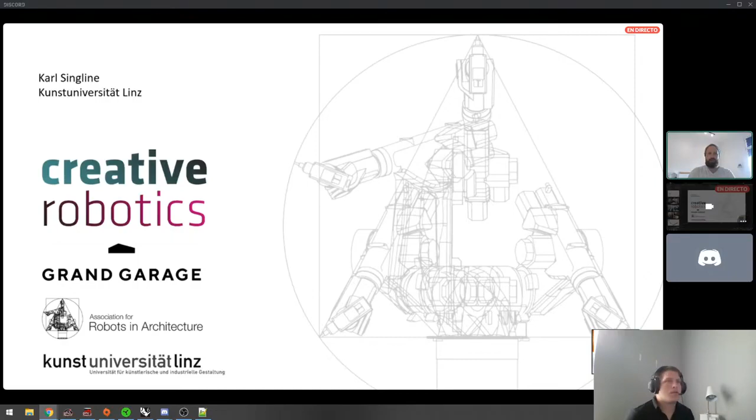Hello, thank you for the lovely introduction, Luigi. From what I understood from the Spanish—my Spanish is very little—I'm Karl Singline from Tasmania, but I'm currently living in Linz, Austria, working with Creative Robotics, which operates out of the Grand Garage. My background is architecture. I have a Master's of Architecture, which I gained from the University of Tasmania in 2016.

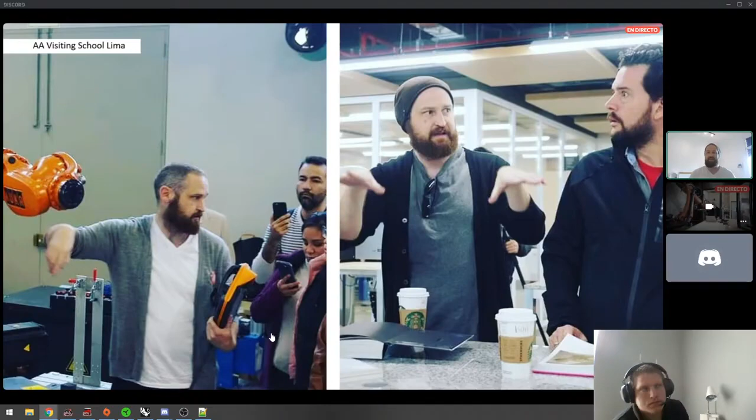So during my Masters of Architecture, which I undertook at the University of Tasmania, I was introduced to both parametric and computational design, as well as the wonderful world of robotics in architecture in particular. It was not uncommon to find me during my Masters working at the robot, trying to figure out how to get it to do anything. Now, through the skills I developed, I travel the world introducing people to creative robotics, robotics in architecture, and how we can use these industrial machines to produce unique and exciting things other than just automobiles and electronics.

A big part of what I do in my job is knowledge transfer, introducing concepts to a lot of architecture students, as well as industrial design and other fields that wouldn't necessarily discover robotics or parametric design at all. So traditionally within architecture and other industries, CAD/CAM looks a lot like this.

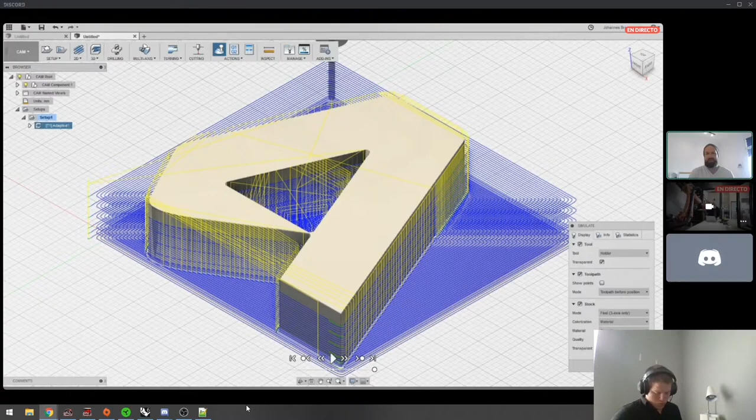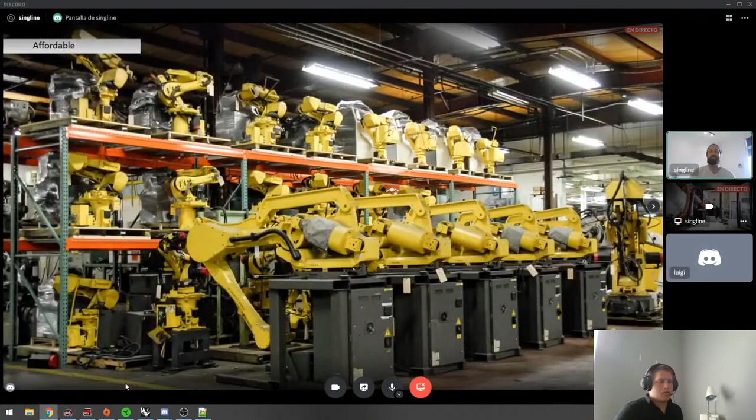Which means that once they've had their life in a factory, all of a sudden there's an abundance of these machines that maybe have done one repetitive task and worn out after a couple of years, but are still good—leading to a fantastic market of amazingly complex machines that end up on places like eBay for relatively cheap. You look at a high quality 3D printer that does only one material and only prints something so big, but you can find a 6-axis industrial robot on eBay that is still perfectly good and can work with the technology we've been developing for well under 10,000 euros, while industrial 3D printers go well above that.

So then the next step was shifting the industrial robots from manufacturing and fabrication in large scale factories to the lab space, where we can start to think about doing prototypes for architecture as well as other creative industries at one-to-one scale.

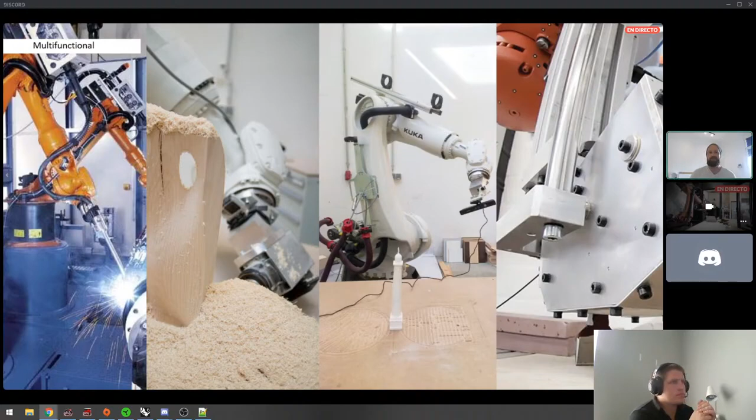The flexibility that these industrial robots introduce is how they can inform design, shift design, and make us think about our design with a higher level of freedom instead of relying on mass-produced fabrication techniques and materials. A lot of these characteristics are embedded in the robot—we've got multifunctional machines that can weld, can do 5-axis milling that a traditional 3-axis CNC can't do.

The flexibility of the different mounts in the last two images - you can have a camera that you can calculate the path for to scan 3D objects in a very precise manner, as well as the end effector, which was developed for one of Creative Robotics' exciting projects that we'll get to. And most of all, it's scalable.

I think we have an interesting question. Rene Jauregui asked if it's better to have a robot than a traditional CNC or 3D printing machine - is it better to have a robot instead of an industrial 3D printer and a CNC?

It's a fantastic question. The short answer from me is a robot, every day of the week - it's where my passion is. But I also believe in the right tool for the right job. If you're not doing something that needs 6-axis, then why do you need a robot? A robot is a lot more flexible than a traditional CNC or a 3D printer. A 3D printer does one thing, it 3D prints. A robot does whatever you can imagine to put on the end of it. It's a big dumb arm, it's got no fingers, no sense, but you can attach anything to the end of it and program it to do 3D printing, CNC, object manipulation, pick and place, testing materials. If you can imagine it, chances are you can do it with a robot. Whereas an inkjet printer or 3D printer is made for one specific task, and that's the only task it's ever going to be good at. So I hope that answers the question.

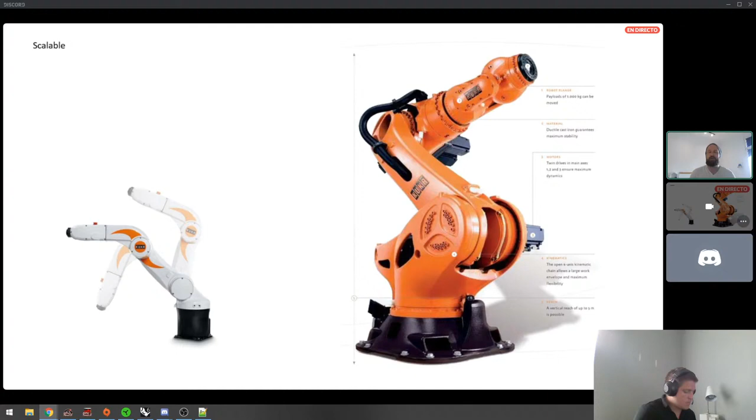So you can prototype digitally with a simulation, and if Kuka PRC or whatever software you're using outputs no errors, you can take that code, make sure it's set for the right robot, and it will repeat the tasks seamlessly. That's taking the digital into the physical, into the real world. Other processes don't allow so much flexibility when going from small scale to large scale, which introduces, especially in architecture and design industries, rapid prototyping - you see a bit of this in 3D printing, but 3D printing is limited, whereas robotics really increases what we can do.

My background is in architecture, so this introduces being able to do doubly curved forms, pairing parametric design, Grasshopper and the like, with robot manufacturing. Then we can actually realize these complex geometry shapes and introduce them into buildings where previously they were either too complex mathematically, or too complex or expensive on the fabrication side. Now these designs, which not too long ago were completely out of the realm of budgets, become more standard and exciting because you're not limited by the materials or manufacturing processes - such as the 3D printing done by Branch in the United States, who used Kuka PRC to generate their forms. It did large one-to-one scale 3D printed structures.

Which brings us into Kuka PRC. This is the software, which I think Luigi has already mentioned, was developed by Johannes Braumann. He's the founder of Creative Robotics, where I now work as a researcher.

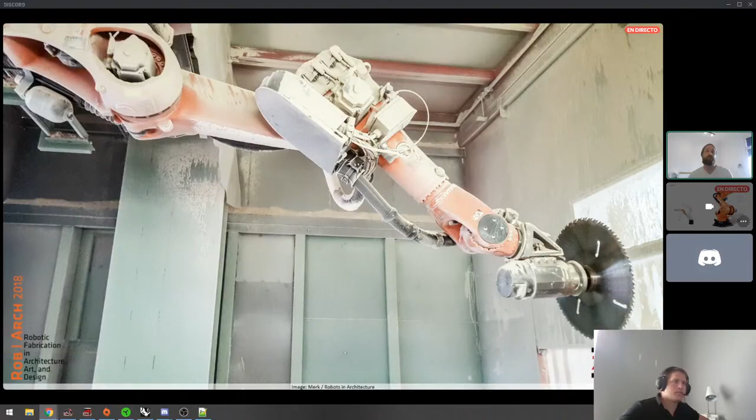The idea was to marry parametric and computational design with actual physical robots, both for industry and creative applications.

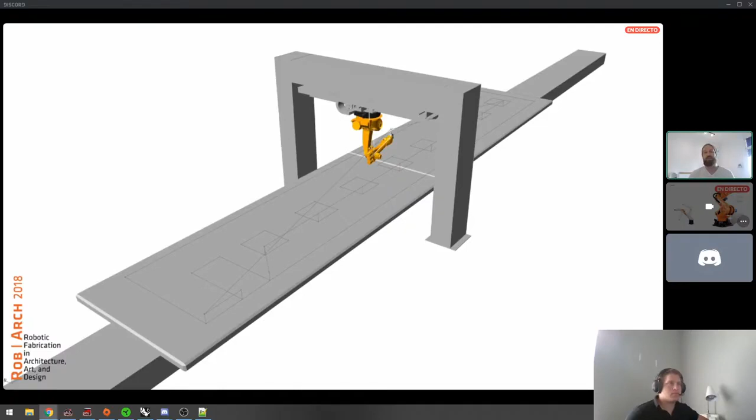Here is an industry application where, instead of the traditional CNC machine, a robot is mounted on a moving linear axis that can perform different tasks. It can have an automatic tool change to do even more than just CNC—a circular saw, a drill bit, a gripper to remove elements as needed.

We can see some of the outcomes in action here. This was all developed with KUKA PRC for real-world industrial application.

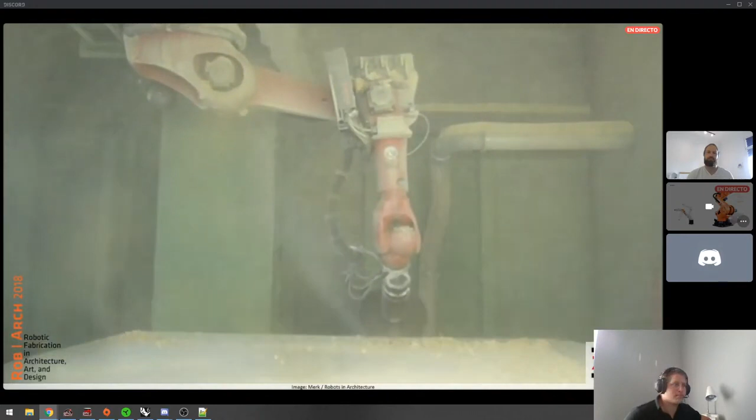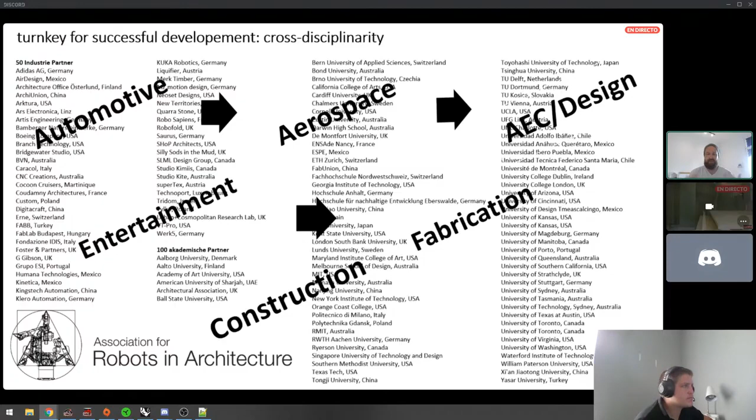The influence that KUKA PRC, in partnership with the Association for Robots in Architecture, has had has gone from starting in architecture to crossing over into many industries—automotive, aerospace, construction, fabrication, and more—all through the power of pairing the parametric with the physical. On top of that, there's now a growing community around the adoption of industrial machines, with a forum where people communicate and share knowledge and ideas on how to adapt these technologies.

There are even communities in other countries that take it upon themselves to translate it into other languages to communicate the knowledge, which is super exciting—including my YouTube channel. I was one of the first people to start sharing this knowledge when I was in university. Nobody knew the capabilities, and I took it on myself to start exploring. That's how I got to know Johannes and started sharing, and then realized: why isn't this easily available on the internet as a 10-20 minute tutorial on how to get an industrial robot to draw?

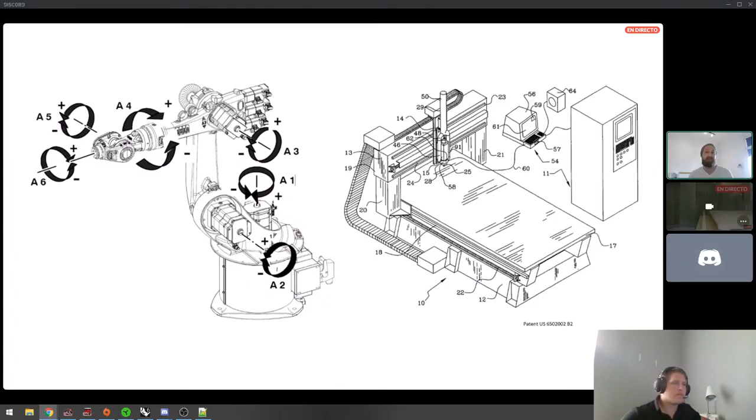So here's a look at the benefits of industrial robots, back on the question about transitioning from traditional to the more flexible robot. It's as simple as looking at an image like this: the true 6 axes of a standard industrial robot and the flexibility of reach, anywhere from 600mm up to 3-4 meters. A 5-axis CNC for metal work is lovely, but they're super expensive, and if you want to do anything other than 5-axis CNC with those machines, you have to buy another machine.

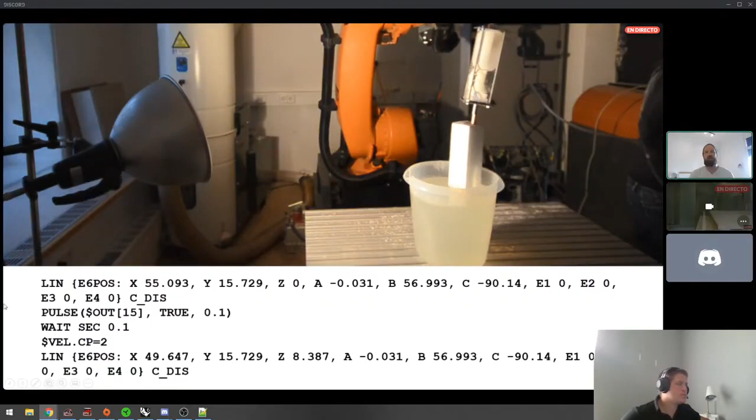Here is a sample of the code that demonstrates this perfectly. It's very easy to write the KRL, the language that a KUKA reads in order to think, but simulating it is where it gets tricky, and errors like this happen regularly. The code means nothing if you can't simulate it, because these machines weigh a ton and move incredibly fast—you want to see what they're going to do before they do it.

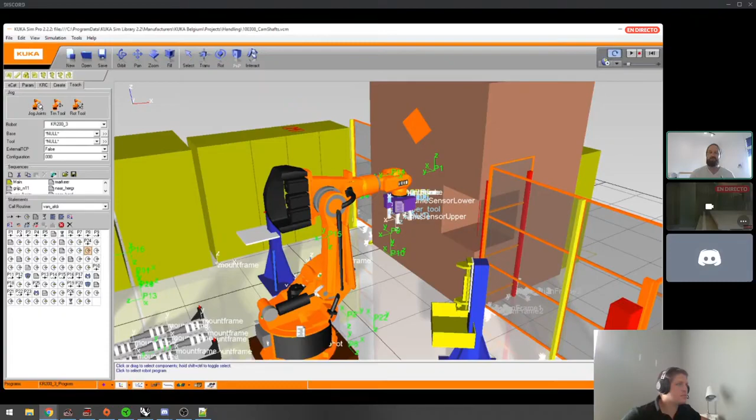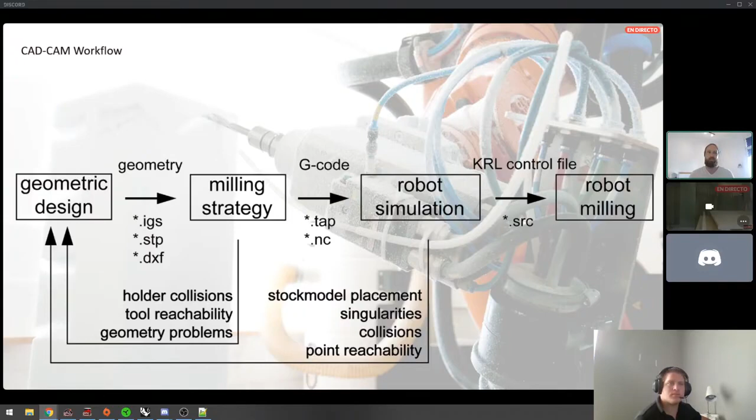Existing simulation software provided by KUKA is quite arduous. It's very traditional CAD software where you're basically programming line by line: move here, do this, move there, do that, check for collisions. This is what the invention of KUKA PRC was trying to avoid—the traditional CAD-CAM workflow where you have your geometric design, shift over into the milling strategy, or 3D printing, or whatever strategy, simulate it, and if you have errors, go right back to geometry design. Only once that initial loop is done can you go to robot milling.

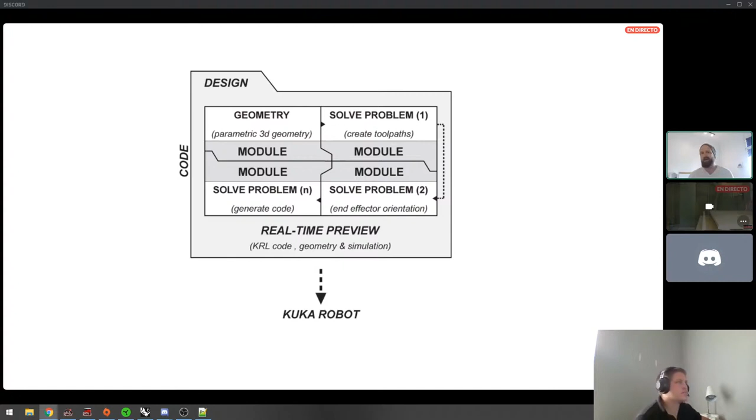Whereas tapping into the power of parametric and computational design, specifically the Grasshopper engine within McNeel's Rhinoceros 3D, it becomes a modular system where your code comes from your design. You get real-time preview as you shift your design around—instead of sending it to the robot and getting an error back, you get immediate feedback that it's out of reach or there's a collision.

So you can see that this isn't the traditional linear method where you're doing errors. You're seeing live, it works. If you make a shift, if you change a parameter, you see immediately the feedback through what the physical machine is actually going to do, creating a much faster and more efficient workflow.

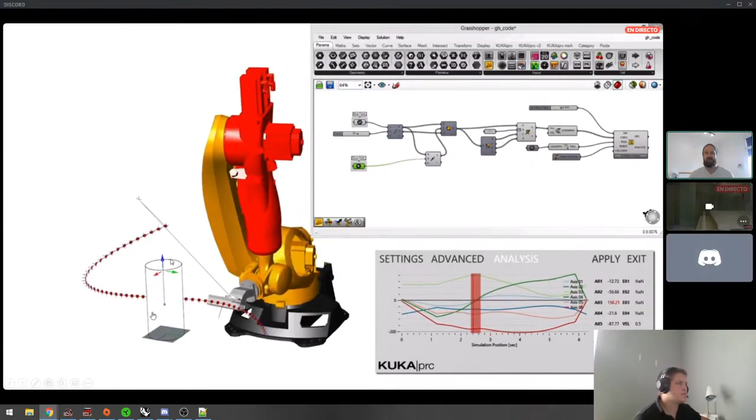So the demonstration of the live data feedback with a full set of analytics for the robot data, informing that an axis is out of reach, meaning that it's going from the range of movement that is safe, and that you can modify your design or your product in real time and get the feedback you need to remain completely efficient.

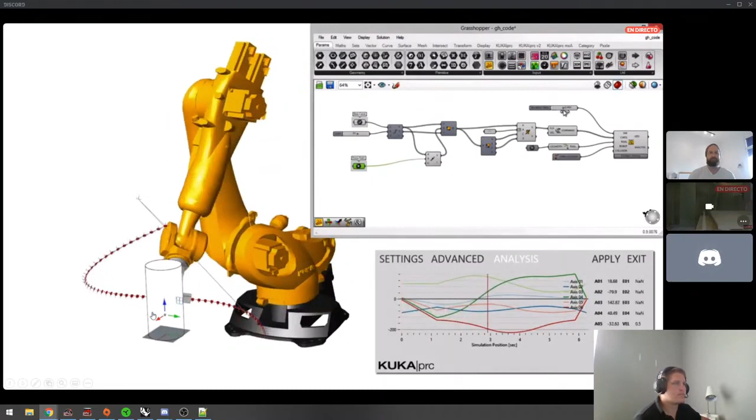Which brings me into Creative Robotics. Obviously, KUKA PRC is kind of what we work in. Johannes invented KUKA PRC, and Creative Robotics is the founder of. We are a research group out of Linz in Austria. We come under Kunst University, the University of Arts and Design in Linz, where we specialize in applying creativity to the robots that we use.

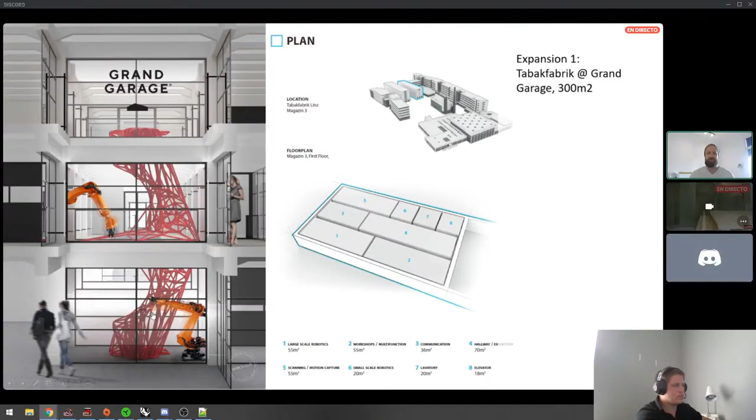We work almost entirely with KUKA robots, but we work with others as well. We have a lab space in Grand Garage, which is part of the Tabakfabrik startup facility in Linz, where we have a 300 square meter robotic lab, which is actually at the moment being expanded into some more office space for us. We've just taken on 2 or 3 new researchers in the last 2 months as we continue to grow and research. We have a couple of different KUKA robots.

Here you can see one that was suspended, inverted to do some 3D printing for a couple of shows. And this is a makerspace where people can come and work, as well as be introduced to different technologies, not just robotics, but 3D printing and scanning and VR and programming.

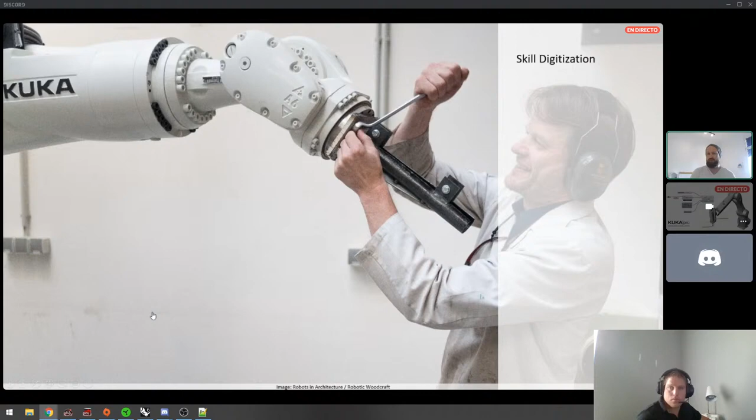A big focus that we concentrate within our lab is skill digitization, embodying the skills of a human within the robotics. Because when you think of creativity, creativity is a very humanistic approach to the world, where we want to make things more beautiful or add some more function or communicate something in a non-traditional manner. So some of the projects we've done is actually looking at the skills embodied in people that are not easily transferred to a digital state, such as chiseling, where the measurement and the expert craftsman had years and years of experience in perfectly chiseling the stonework.

But then when you showed them the data and said, oh, you have it at this angle and you're hitting it harder when you need this, they had no idea, because it was so embodied in the muscle memory and just years of practice and working.

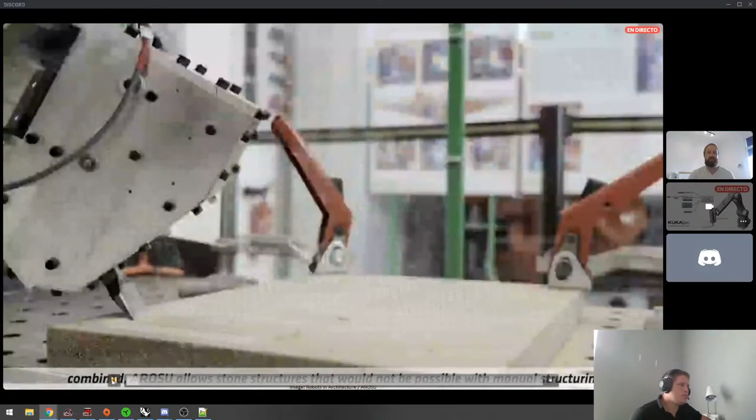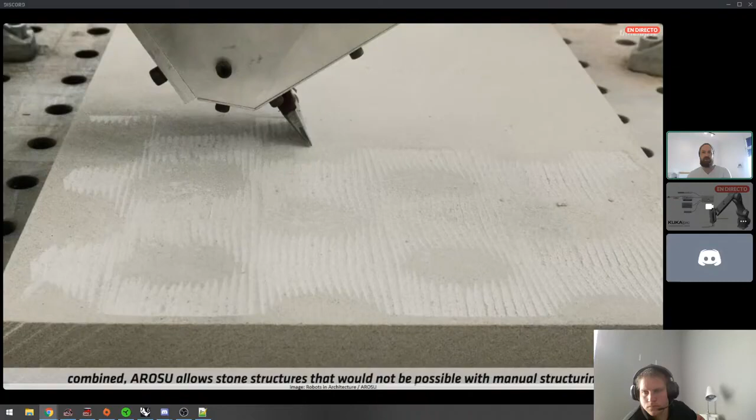And to take that data, and if you apply the information from mapping them, you can get an output from a 6-axis machine that you just cannot get from a human, where we can see that for a human to hold a chisel at an angle and then hit it with a heavy mallet, of course it's going to go to the weakest position and be flat 9 times out of 10. So it's not taking the skill of the person and removing them from the equation. It's applying it and adding it with an industrial robot.

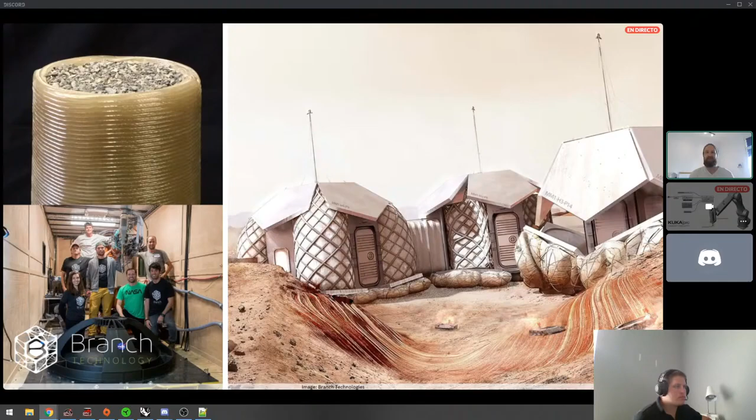A lot like Branch, I mentioned earlier, also do with their 3D printed structures of lattice work forms through KUKA PRC. They actually went on and won a large grant, a large prize for developing a system of 3D printing for getting people to Mars, and how it's possible to make safe habitation on Mars as a different planet. And then another fantastic group that have been born from Creative Robotics is Yokai, a couple of young guys who study fashion and communication within Kunst University, who developed their own fashion technology.

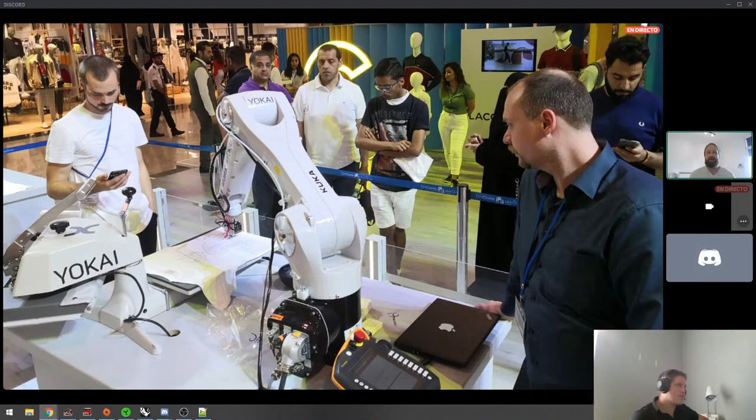So Yokai, they looked at 3D printing technology and applied it to the fashion industry, where instead of traditional sewing of materials together, what if you welded it together with extruded plastic, and then you can get more 3D forms without the traditional 2D pattern making. These guys have traveled the world with their technology. Here they are in the Middle East, showcasing their KUKA robot and doing live demonstrations and printing on t-shirts.

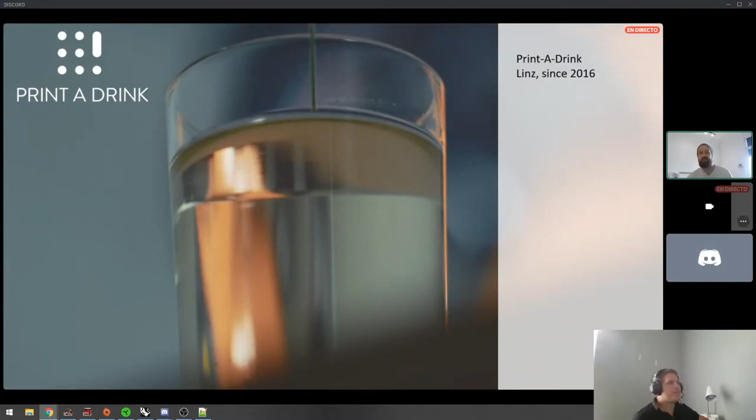Here's another fun one that was born from one of our researchers, Benjamin, who developed Print-A-Drink, where he came up with the idea of taking the extrusion technology and 3D printing shapes within drinks. He now travels the world showcasing the technology, where he developed a material that would float within the liquids, that also didn't taste terrible and was edible, of course. This was born through his research done within Kunstuni and Creative Robotics, and all achieved with Kuka PRC.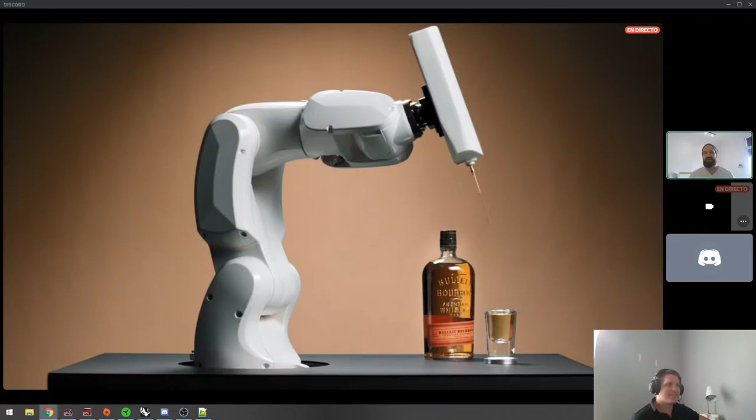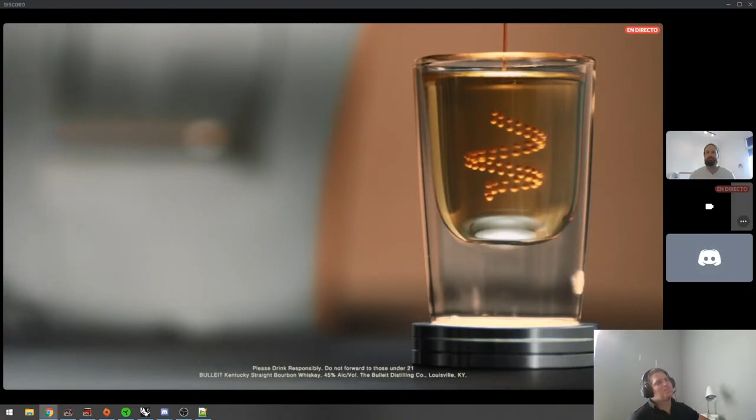As someone with an architecture background, it's not something that jumps to my mind as immediately great, but when you see the output, it's absolutely lovely, and what a lovely final product. So he's working with Bulleit out of America on a regular basis showcasing 3D printed drinks. As well as a lot of what we do is working with industry partners, not only in Austria but also internationally.

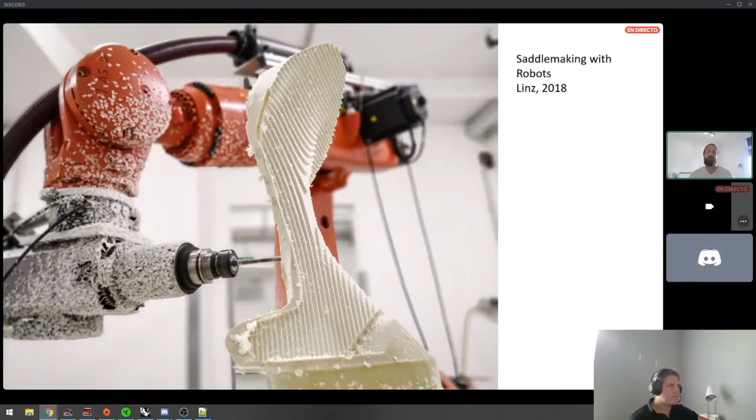This was one of the big ones we did with manufacturing and 5-axis milling, with the last saddle maker in Austria. They approached us and asked, we need to get more with the times without losing too much of the traditional skills imbued in making a saddle. So it was a big question of prototyping and how we can do it, and then what is the benefit of investing. You can see it's quite a large robot, which is a big investment monetarily, but you have to make sure that investment is returned.

Then the question becomes very easy. In order to make a saddle model, it is expensive and very time consuming. But through the adoption of parametric design, all of a sudden you can incorporate custom sizes that you couldn't previously, because you had to have someone hand make the custom piece. Oh, this person wants it slightly larger than medium, this person wants it slightly smaller than large, where someone then has to develop it. But if there's a parametric model behind the whole process that can then be fed into a robot, all of a sudden they see the potential and become competitive.

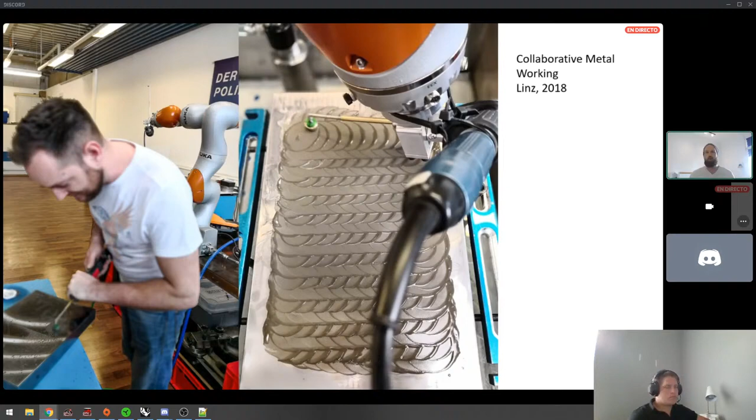As well as more, this is a project done using the KUKA iiwa, which is a collaborative robot that has a very fine level of data coming through of the pressure. This was polishing, like professional polishing of car materials and surfaces. Here we see the real benefits of working with high-end robotics, where there's accurate, fine, and detailed work. And the robot, above all else, is patient.

So it will repeat these patterns perfectly over and over, as long as you tell it to do. These are just skills that people learn and develop, but then a robot might just do accurately, and instead of getting through it in half an hour, perhaps it can just sit there and do it over a day or longer, and the results are amazing.

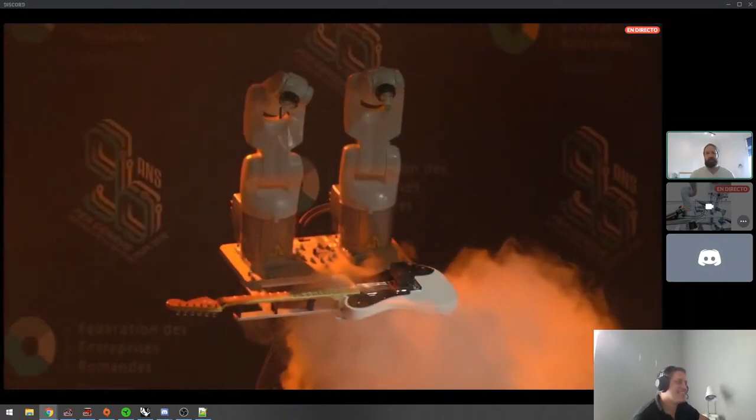Carl, we're unable to hear your videos, so maybe you can share later where they can actually see these, the guitar playing and the sound and everything. Oh, you're not getting the video? We're getting the video, but not the sound. Oh, okay, yeah, sure. Just remind me.

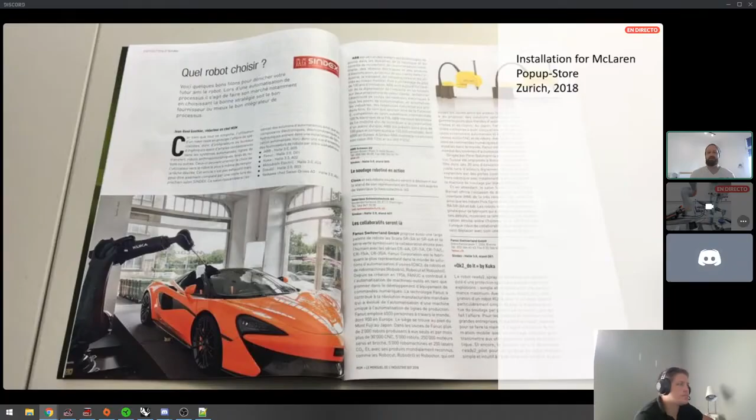As well as an installation that we did for the McLaren pop-up store in Zurich, Switzerland in 2018, where you can look at it and it's a robot that is clearly just polishing, dusting the McLaren supercar, more just an expression of technology. The project itself is pretty straightforward, just the tool pathing, but pairing it with the technology to showcase, yes, this is capable of a lot more.

And each year, Creative Robotics is invited to participate in Ars Electronica Festival that happens yearly in Linz, which is one of the biggest cultural electronic festivals, where it's about creativity and artistic expression with technologies, not just robotics, but of course a lot of what we do is robotics.

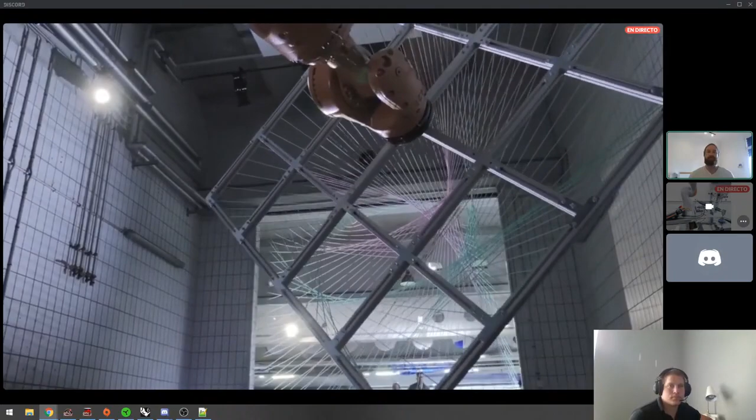And this is a project that was done by one of our researchers and a colleague of mine, Emmanuel, of robots doing nothing, where the data being sent to the robot is actually driven by external data and some AI, and the robot just responds to that. It's the geometry that's generated through the strings attached as it just rotates and operates within the space, which became a bit of an installation.

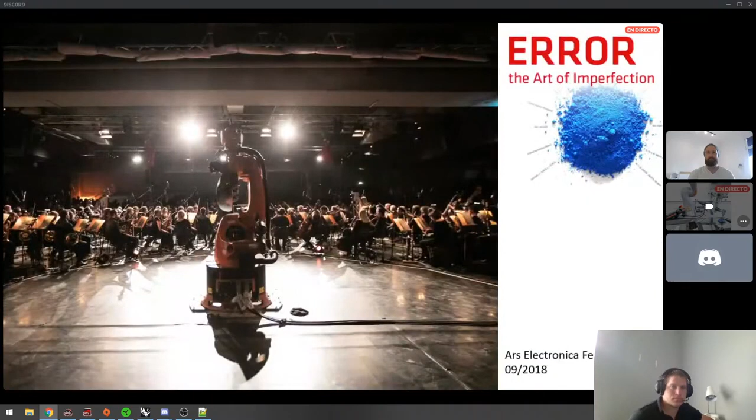And then we come into the big time projects of each year. There we're asked to demonstrate or participate for something. Sometimes it's the Gala, sometimes it's something else within Ars Electronica.

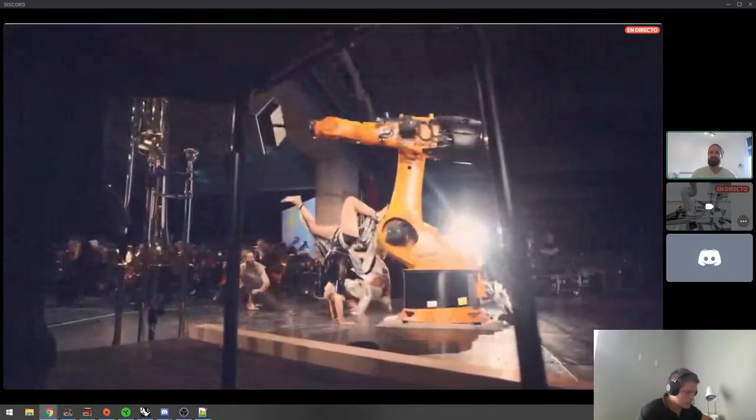And in 2018, it was a dance performance with a full orchestra, with the fantastic Silke performing with the robot as another dancer, where you probably shouldn't be jumping and dancing around a live robot, but it's artistic expression, I think, and worthy. So we had a couple robots during this performance in 2018.

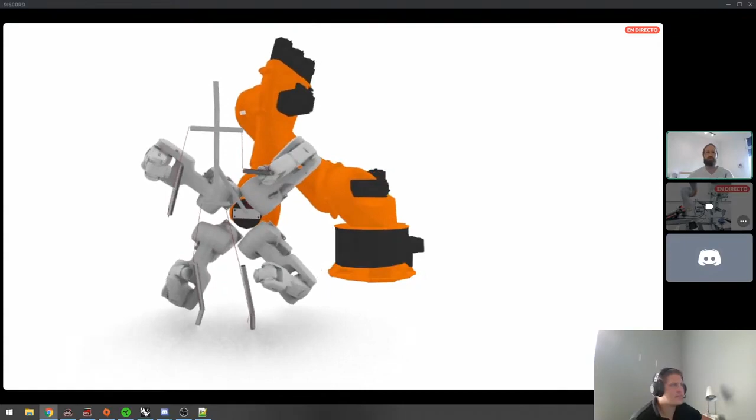Which leads into our 2019. So when you have one or two robots and they ask, the only brief is bigger and better. So what's bigger and better than one or two robots? 5 robots. So last year we had a Quantec with 4 Agiluses all attached to the end as the end effector, where Silke once again was the performer who was motion tracked in a studio. Her dance, her performance was completely recorded, which we then could translate into robotic movement across the 4 robots using Kuka PRC, of course.

And then during the performance, she actually danced with herself being replicated by the robot. So she was dancing with the recording of herself. I don't have the video here for some reason, but that's on my YouTube channel. There's a fantastic video of just a bit of the process and getting the robots to talk to one another. It was a big, stressful couple of weeks for Creative Robotics, but thankfully it worked for a couple of performances and it was a part of the gala.

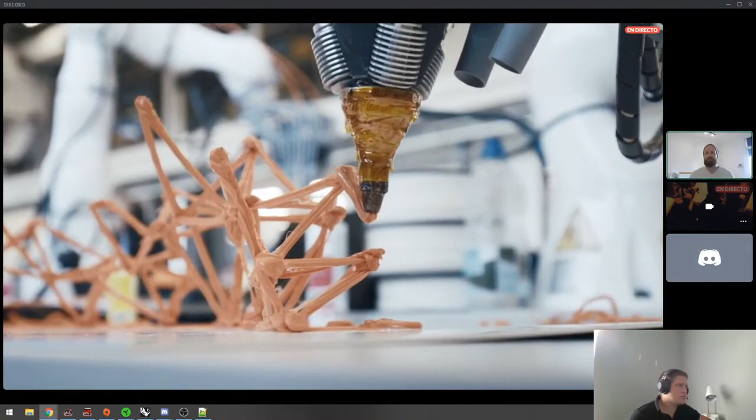And then finally, we have Robots in Architecture, which has a conference every 2 years. Obviously 2020, unfortunately, has not happened, but since 2012, every 2 years there is a conference that I highly recommend people look into if it's available or practical to attend, where workshops happen, people communicate, deliver papers. And this is another video without any audio that you can hear, but it's a chance for people to come together, develop new ideas, and learn a lot more about the creative robotics scene.

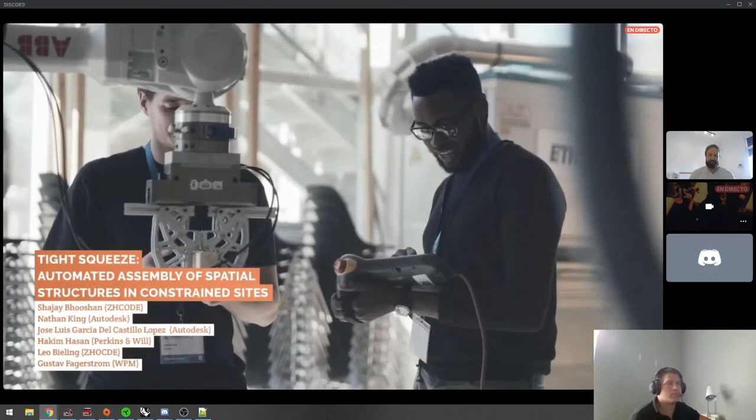I recommend if you have the opportunity to attend. It's a fast track way of getting some skills, and some of the top roboticists in the world are always in attendance. You might even have a chance to meet me sometime in real life.

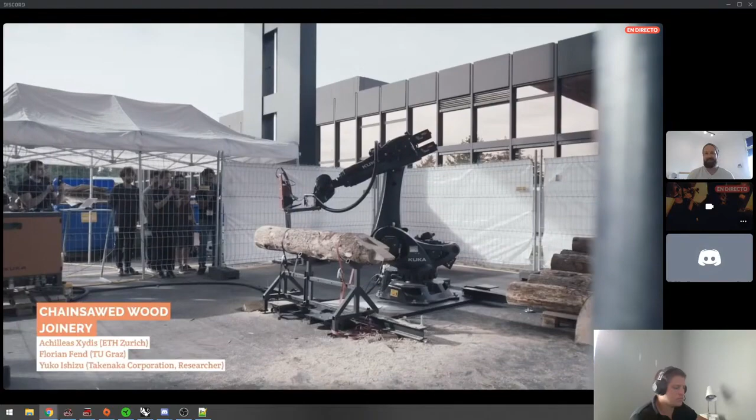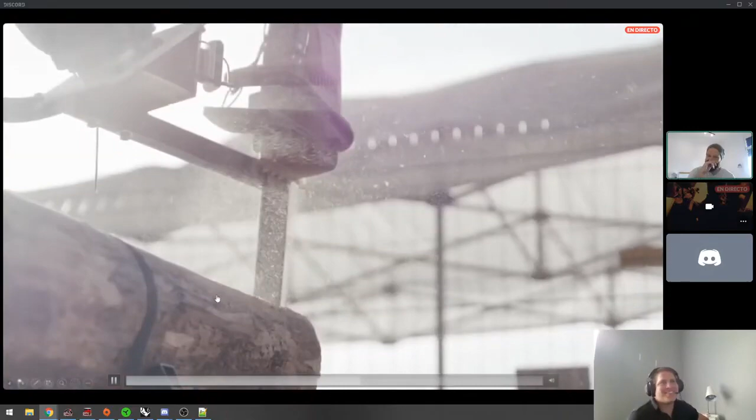Any chance it's gonna happen in Mexico soon, Carl? Luigi, that's on you, mate. You have to convince us. We'll bring it to Latin America for sure, one day. Yeah, we've had United States, but no Mexico, and I know Johannes is not against the idea. So also once all the COVID is done, we are planning to have a workshop with you, Carl, in Mexico, where you can show us all these skills and help us get our projects done with robots. Probably focus at digital manufacturing. We probably are looking for next year, right, Carl? Yeah, absolutely. It was January when I was last in Mexico, and we taught a lot. And it would be great to get back there and teach a new group.

So, is that your presentation? Do you have something to add to your presentation, Carl, before we go to the questions? No, I think that's about done with the work that we do, and we've had a bit of an introduction to KUKA PRC as well as how we work and the work structure.

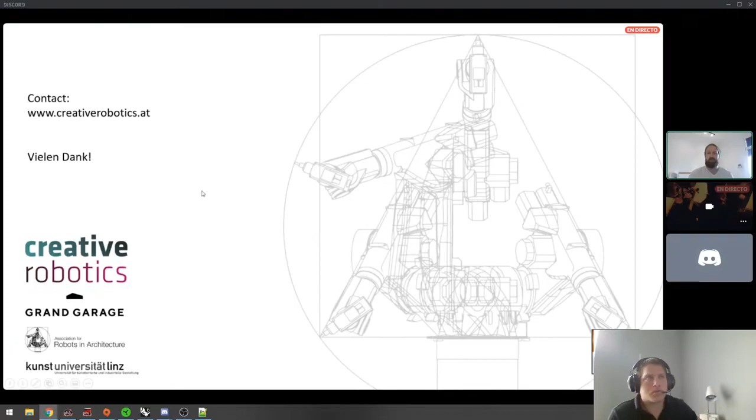Meanwhile, while the people ask their questions, maybe we can answer the ABB and Fanuc versus KUKA robot question. Why KUKA PRC is KUKA PRC? Why KUKA? I get this question all the time, and it's not a bad question. It makes perfect sense, like is there something about KUKA that is better, or when you're working in technology, you want to think you have something, or working with the best, of course. But I studied architecture and my school had a KUKA, and they had the license for KUKA PRC, which only operates in the KUKA environment.

Every robot manufacturer has their own language, they're not open source unless it's one of those little open source bots. ABB has Rapid, KUKA has KRL, and there are plugins for Grasshopper that do KUKA, ABB, Fanuc, of course. But I was introduced to KUKA PRC, and through my sharing and my work with YouTube and knowledge transfer, I have a good relationship with both Robots in Architecture, Creative Robotics, Johannes. But students looking to get into robotics, I say you don't need a robot to start, you just need to start simulating, and then whatever you can get your hands on. If your university has a robot of a certain manufacturer, then that's your robot.